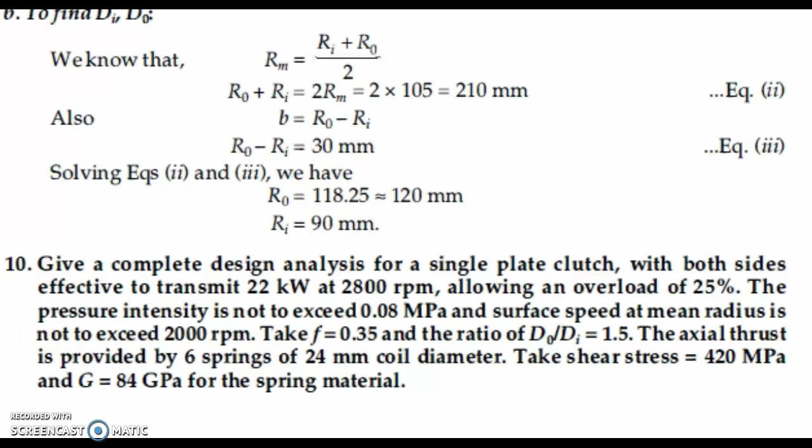So next we can write the given data. What are the given data? N dash is equal to 2.

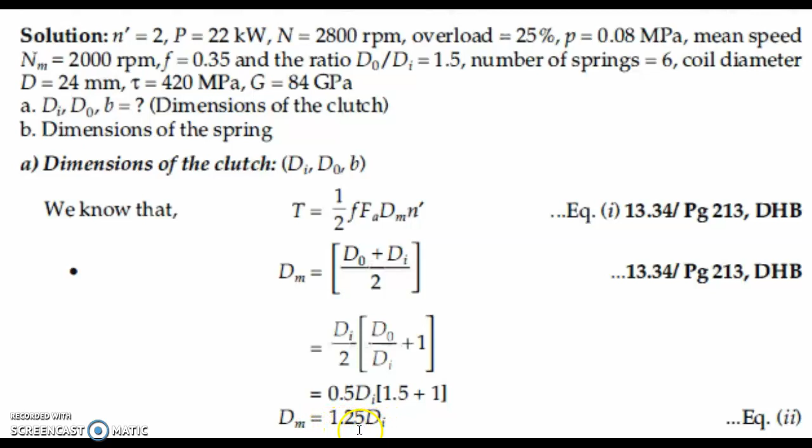That DI by 2 into, what will come in the first part, DO divided by DI plus 1. Then we can write this equation like this: dm is equal to 1.25 DI. So that is the condition, that is dm in terms of DI.

Similarly, we can write FA also in terms of DI. How? Again, go to the data book, page number 258, equation number 13.9d.

What is that equation? FA is equal to half pi P max DI into (DO minus DI). That is pi by 2 P DI into (DO minus DI). Here also we have to take DI outside.

Then that will become DI squared into (DO divided by DI minus 1). So we can write this equation also, that is FA in terms of DI.

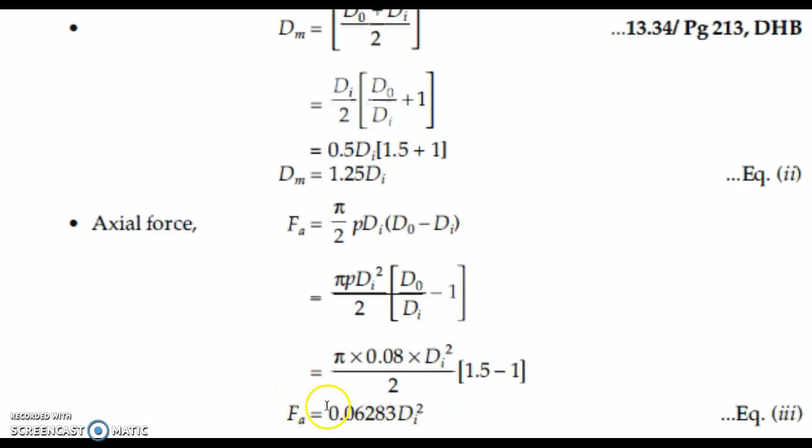Now we can go for the main equation. What is that main equation? T is equal to half into mu into F into FA into dm into n dash.

Here T is also an unknown parameter, so T also we can find using this equation. What is that equation? General equation, P is equal to 2 pi N T by 60.

Here we can substitute the power value, N value. So if we substitute this value, we will get the value of T as 105.04 into 10 raised to 3 Newton millimeter.

Then we can write like this: the general equation, page number 213, equation number 13.34, T is equal to 105.04 into 10 raised to 3 is equal to half into, what is the value of mu?

This value is 0.35, that is P, pressure is given, P into, then the values of n dash is given as 2, then FA and dm are in terms of DI.

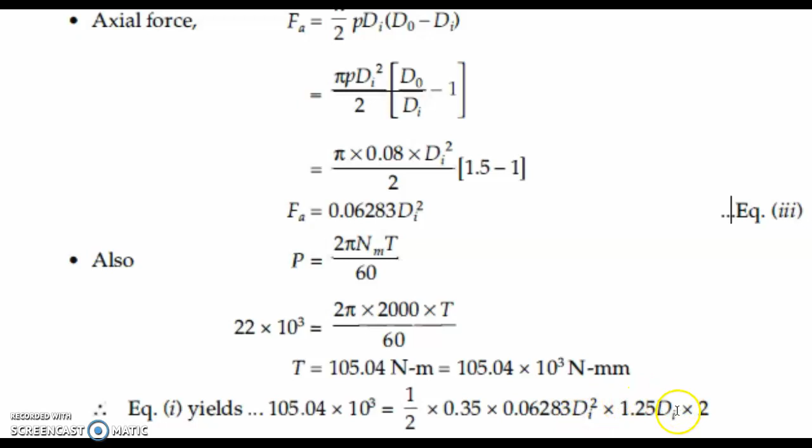So in this equation, what is the unknown parameter? Only di. If we substitute this value, or using this equation, we can find the value of di. That will become 156.34, which we approximate to a higher value, 160 mm. That will be the inner diameter.

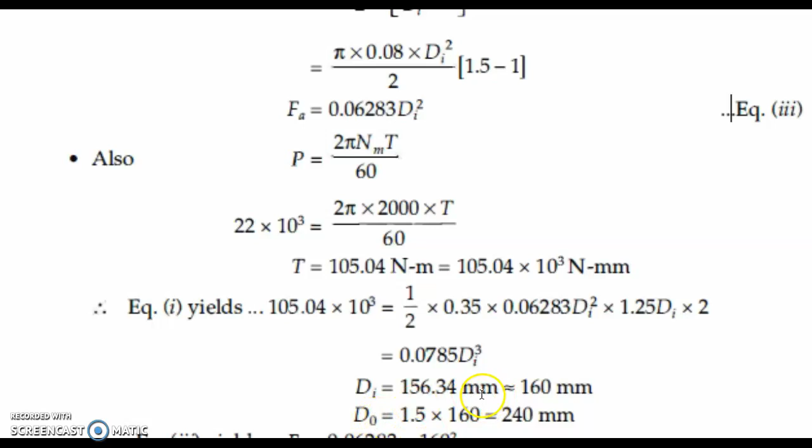Then what will be the outer diameter? That is already given in the question. The ratio do divided by di is equal to 1.5. So if we consider di as 160, then we can find do is equal to 240 mm. This is the basic dimensions.

Then we can go for the fa value. We already found the value of fa in terms of di. So once we calculate the actual value of di, we can go for the final value. fa is equal to 1608.45 Newton. Then what is the value of dm, the mean diameter? That is already given in terms of di, so we find this as 200 mm.

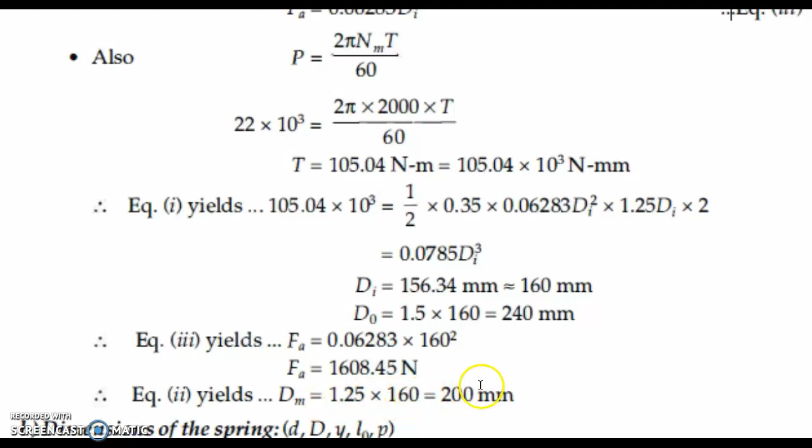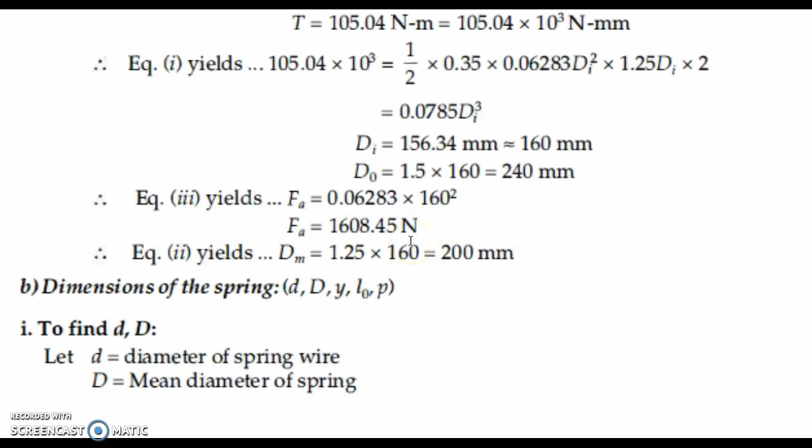Now we can go for the dimensions of spring. The clutch design values we already calculated. Now we move on to the dimensions of spring.

For that, it is the general equation. From the table, equation number 11.1, page number 169, we can find the value of tau. Tau is equal to 8F dk divided by pi d cube, or that is equal to 8F ck divided by pi d square. So we take the equation from the data book, page number 169.

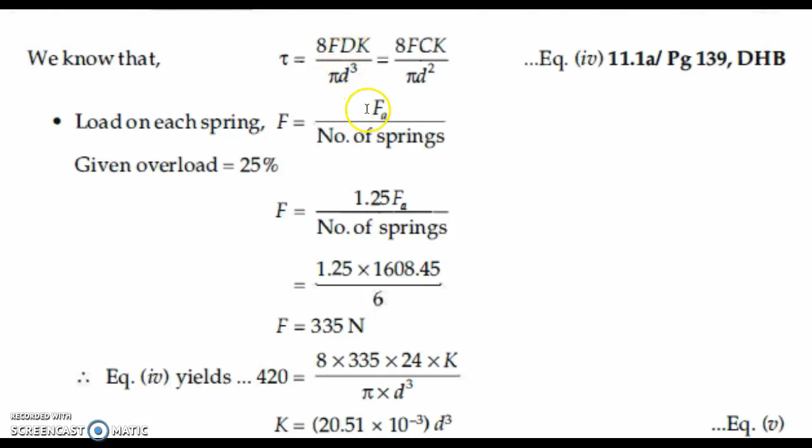Then if we substitute the value of F in the first equation, tau is equal to this equation, with D already given, F already given, K as the unknown parameter, and pi and D already given. Substituting these values, we find K is equal to 20.51 into 10 raised to minus 3 d cube, or we can write K is equal to 2 into d by D whole to the power of 0.25.

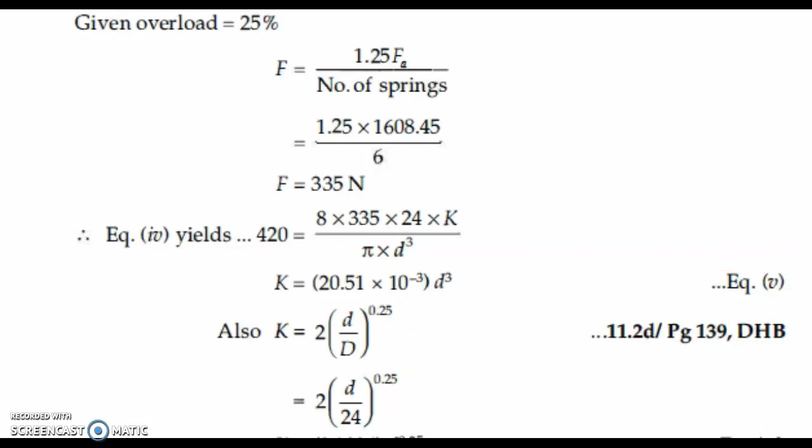We get this equation from page number 139, equation number 11.2d. Just go through the data book, page number 139, equation number 11.2d. Here the value of P, capital D, is given in the question, but small letter d is not given. So how can we find it? We write that equation like this: K is equal to 0.9036 into d raised to 0.25.

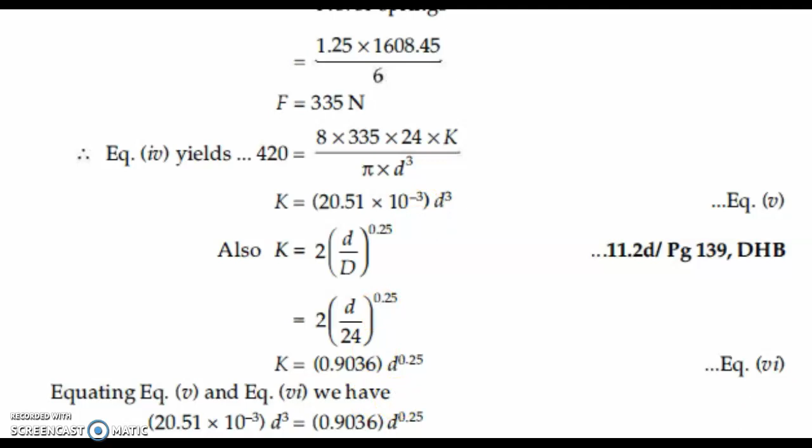So we get two equations with two unknown parameters. What are the parameters? K and D. If we compare these two equations, we get the value of small letter d, the diameter of each coil. That value becomes 3.96, which we approximate to 4. That is the value of small letter d.

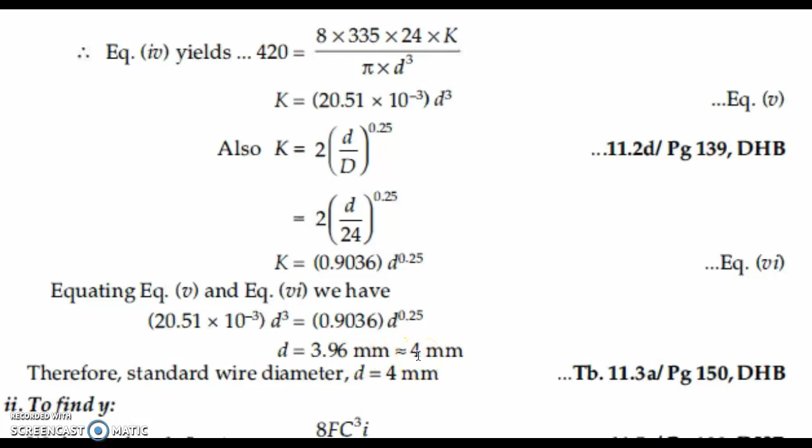That is the diameter of the spring coil, not the bigger D, the overall diameter. Then next we go for the value of y. How do we get the value of y? We obtain it from page number 139. Go to the data book, page number 139, equation number 11.5a.

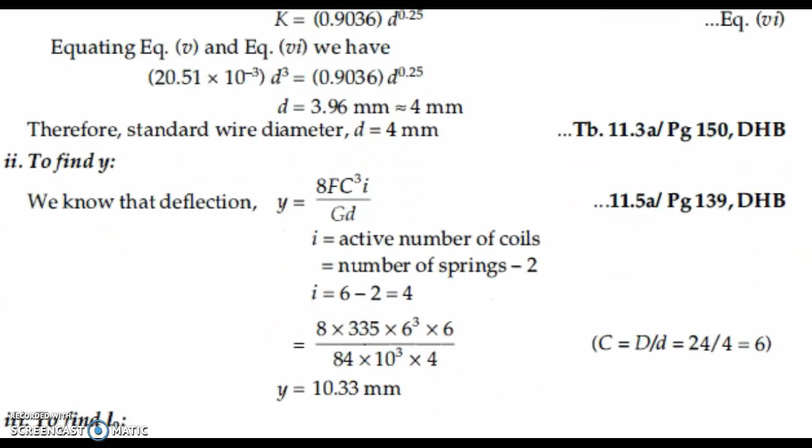Y is equal to 8fc cube I divided by gd. Here all the parameters are given, so we substitute each value in this equation, and we get the value of y is equal to 10.33 mm. Now we can go for the L0 value.

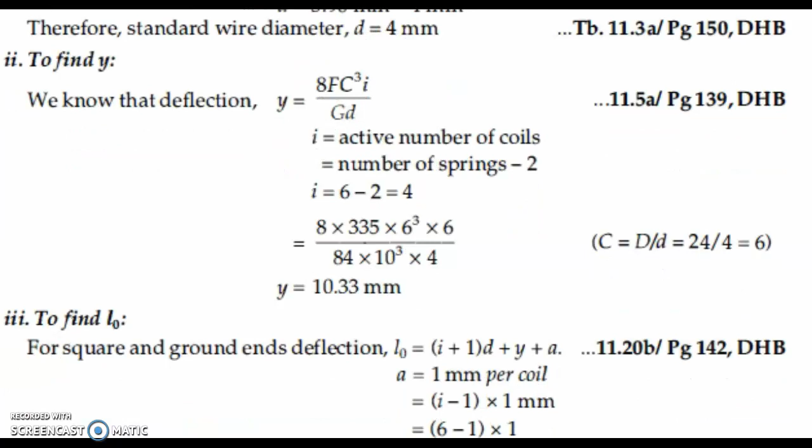What is that L0? Free length. Again go to the data book, page number 142, equation number 11.20b. For a square and ground ends deflection, L0 is equal to I plus 1 times d plus y plus a.

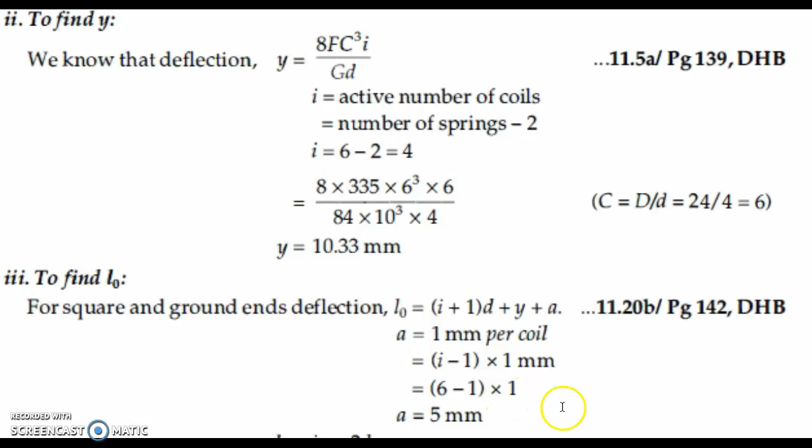The value of a we already calculated as I minus 1 into 1. What is that I minus 1? That becomes 5. Then if we substitute all other values, y which we already calculated in the previous section, and d which we also calculated before, in total we get the value of L0 is equal to 43.33 mm.

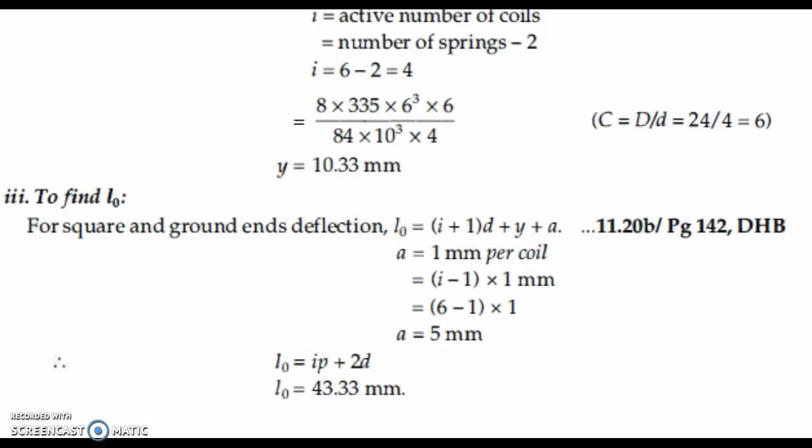Then lastly we can find the value of P using this equation: L0 is equal to IP plus 2D. This equation we get from table 11.4, page number 159. So go to page number 159.

Sorry, it is not page number 159. I will note it as 189. Table 11.4, the value of L0 is equal to IP plus 2D. Here we can substitute the values: I is 6, L0 is 43.33 (converted to mm), then 2D, where D we already calculated in mm. Substituting this, we find the value of P is equal to 5.89, approximated to 6. Okay, thank you.